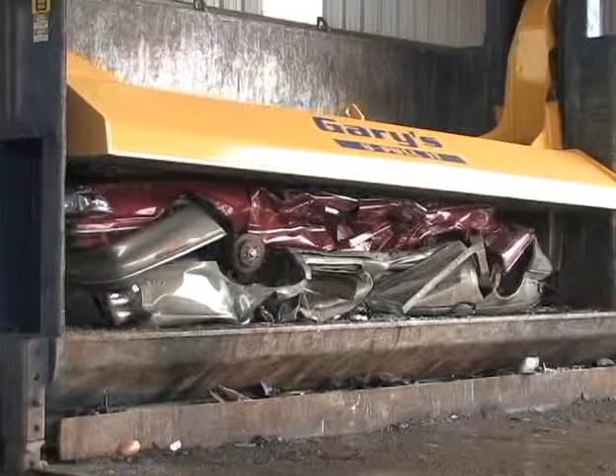But the fact remains, America is married to the automobile as its principal form of transportation, and any solution to the nation's energy and conservation dilemma must address America's obsession with the automobile. What few people realize is just how aggressively and consistently the automotive recycling industry has pursued green sustainability.

In fact, the automobile is the most recycled product in the world today, with nearly 95% of the vehicle weight recycled. The actual recycling process may start at the accident scene, where the tow operator or the first responder is responsible to clean up the glass and debris expelled from the vehicle because of the collision. That material is then placed in the trunk for the recycler to process.

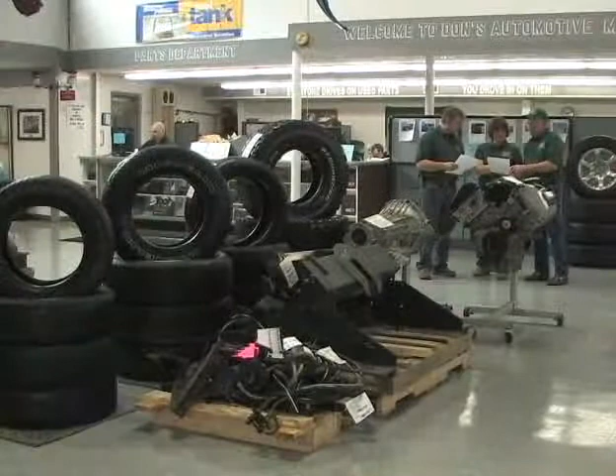Leading the effort to educate the consumer and auto manufacturers on the benefits of sustainable green automotive recycling is the Automotive Recyclers Association, or ARA. Through its affiliates, the organization serves thousands of member companies and part suppliers in the United States and has cooperative agreements in 14 countries spanning the globe.

The ARA's efforts range from partnerships with original equipment manufacturers on automobile design and recyclability to the establishment of a green group of auto recyclers called Certified Automotive Recyclers, who promote and practice sustainable green disassembly standards.

Choosing recycled auto parts when repairing your vehicle is a green option in a number of ways. Certainly, it will save you some green in your wallet, as the parts are generally far less expensive than new, yet often carry the same or even a better warranty. Besides, why put a brand new part on a used car? Why not give the environment a break and reduce your carbon footprint, limiting the number of pollutants going into the air to produce all those new parts?

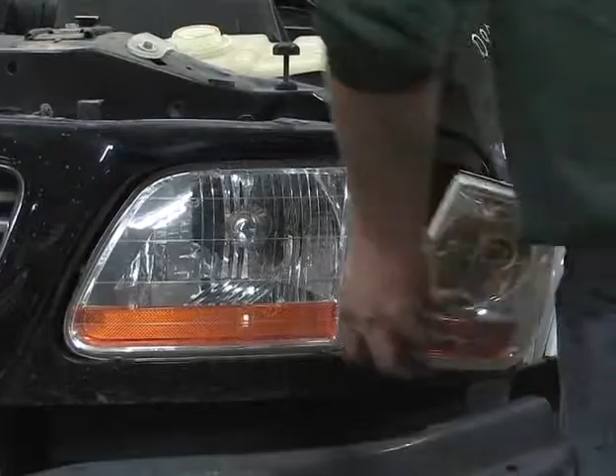Of the nearly 250 million vehicles on the road today, 12 million will reach their end of life this year. For nearly all of those vehicles, end of life does not mean the end of the road. Everything from wheels to seats are sold to the general public who work on their own vehicles. After all of the parts are removed, the vehicle is then crushed and sent to a shredder, which sizes and separates all of the materials.

Such recycling saves an estimated 85 million barrels of oil every year that would otherwise have been used in the manufacturing of new parts. It also saves enough steel to produce almost 13 million new vehicles.

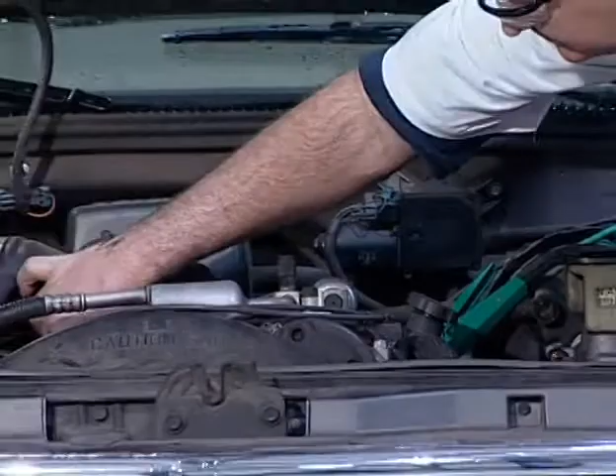Still, in many car owners' minds, recycled parts just don't measure up to new ones. It might seem a legitimate concern to some consumers. For example, why would I want a recycled airbag in my car? Not only are used recycled parts built by the original vehicle manufacturer to meet specific durability, reliability, and most important, safety standards. New automobile designs and materials challenge automotive recyclers.

As automobile recyclers strive to remain at the forefront of the green movement, industry leaders continue to seek new ways to demanufacture vehicles, remove pollutants from the environment, and meet consumer demand for green replacement parts. As the transportation needs of the nation meet the sustainability needs of the planet, auto recyclers have adopted a proactive green approach.

In our effort to create and maintain a sustainable green vehicle demanufacturing process and parts distribution network, automotive recyclers strive to take it one step further and maximize the 3 R's: reduce, reuse, recycle. Reuse is one step ahead of recycling in this equation, and the winners are consumers and the environment.

In countries all over the world, urbanization is creating ever-growing volumes of waste. With environmental problems now of paramount concern, ways have to be found to process waste materials safely, efficiently, and without causing pollution.

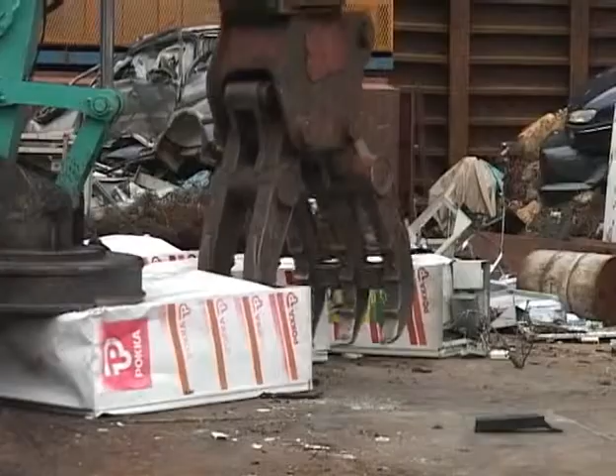Currently, technologies for separating valuable, reusable resources, such as iron, aluminum, and copper from waste, are attracting great attention.

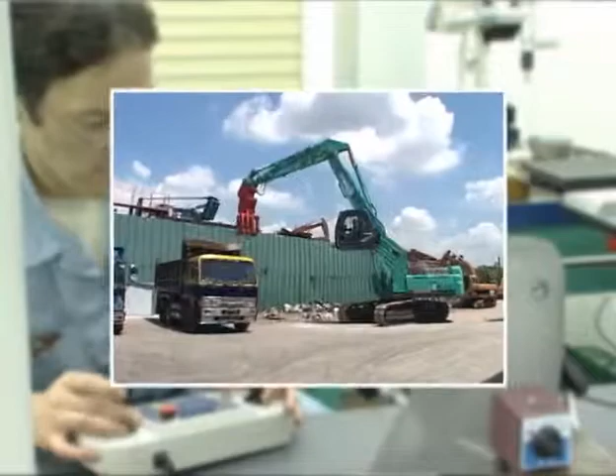To respond promptly to the new requirements of these times, we at KOBELCO have been pressing ahead with research and development on machines that can assist in the handling of scrap metal. Among them are the KOBELCO multi-dismantling machines, which make light work of dismantling end-of-life vehicles and other discarded appliances to separate reusable resources.

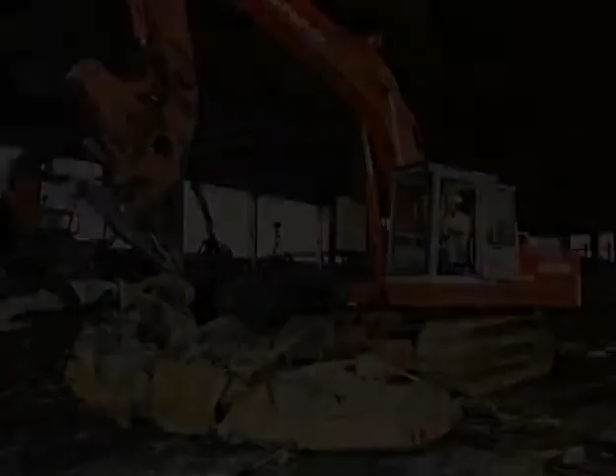In 1979, KOBELCO developed Japan's first specialized machine for vehicle dismantling, and the scrap metal business never looked back. The objective at that time was to provide mechanized means for the safe removal of engines, chassis, and other hard components from vehicle bodies.

Subsequently, attention was focused on recycling non-ferrous metals such as aluminum and copper, and KOBELCO have devoted years of research to develop and launch a full lineup of multi-dismantling machines that can take apart engines as well as vehicle bodies and remove tricky parts such as harnesses.

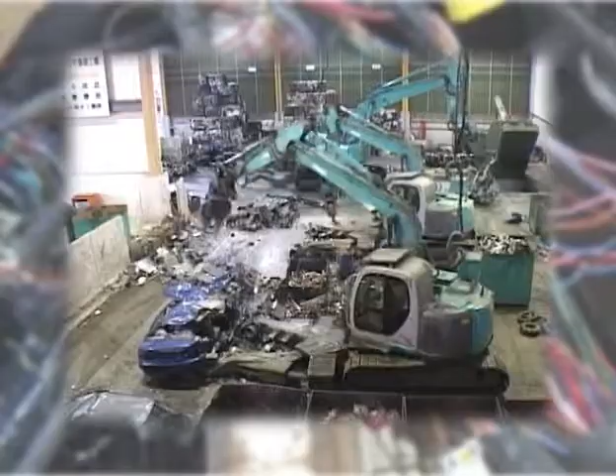Here we look at how two different multi-dismantling machines, the SK200 and the SK135SR, bring outstanding performance and user-friendliness to vehicle dismantling work.

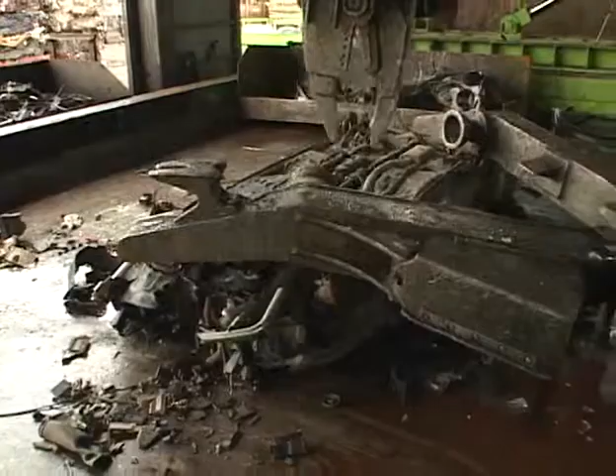Multi-dismantling machines are fitted with a clamp arm for gripping and cutting, and a rotating nibbler for twisting and tearing. Through the combined operation of these features, vehicles can be taken apart with greater precision, and their component parts sorted and separated.

Vehicle dismantling work using a multi-dismantling machine can be broadly divided into two processes: dismantling the vehicle body and dismantling the engine.

For body dismantling, the SK200 is ideal. It works fast and excels at handling rigid parts, such as chassis, where real strength is required.

For engine dismantling that involves extracting harnesses and other more delicate operations, the SK135SR comes into its own.

The SK200 is fitted as standard with a powerful KVE 720 PR nibbler for the toughest jobs. And the SK135SR is fitted with a KH 750 PR nibbler designed to accomplish more delicate tasks.

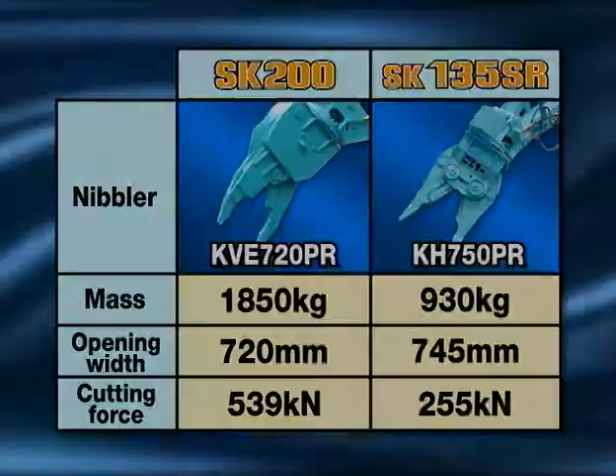Before we look at how these multi-dismantling machines actually tackle an end-of-life vehicle, let's examine their controls. These consist of buttons located above the levers on the right and left side of the cab, and foot pedals.

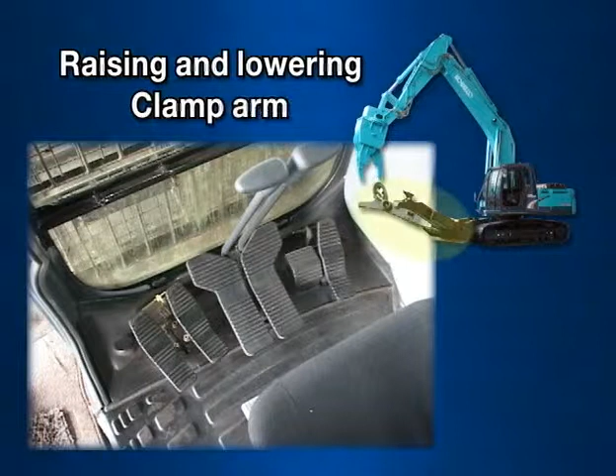Raising and lowering the clamp arm is controlled with the outer pedal on the left. Pressed at the heel, it raises the clamp arm. Pressed at the toes, it lowers it.

The clamp arm is opened and closed by means of push buttons to the right and left above the levers. The button on the left opens the clamp arm. The one on the right closes it.

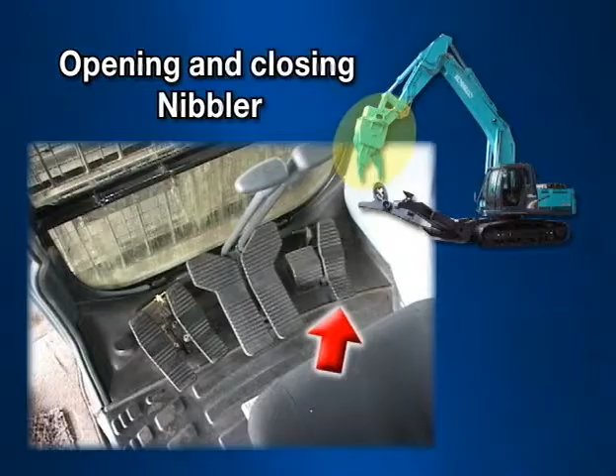The nibbler is controlled through the outer pedal on the right. Pressed at the heel, the pedal opens the nibbler jaw. And pressed at the toes, it closes it.

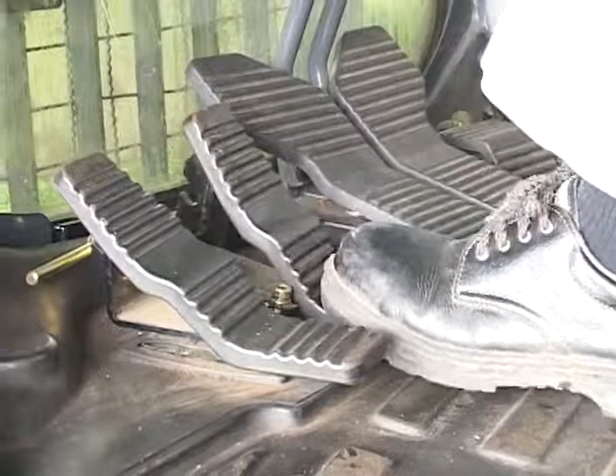Rotating the nibbler is controlled with the second pedal in from the left. Pressing it at the heel rotates the crusher to the left, and pressing it at the toes rotates it to the right. Full dismantling can be accomplished through a combination of these controls.

There's some preparation to complete before actual dismantling work can begin. The recycling of parts from end-of-life vehicles is expected to become an increasingly important business. Engines, doors, and any other parts that can be reused have to be removed in advance. For dismantling to be both safe and efficient, preparation also includes removing tires, releasing gas, and draining off fluids.

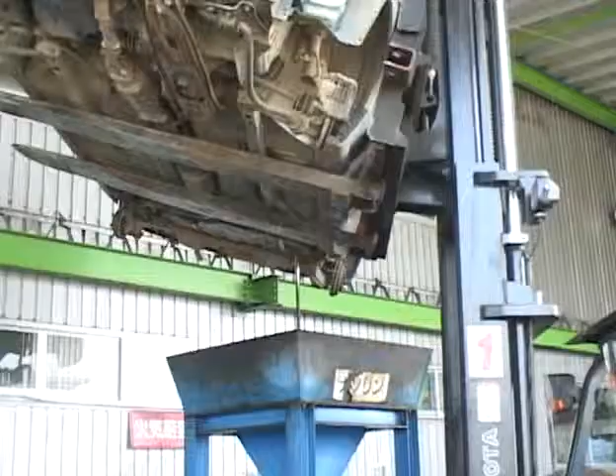Once the preparation work is complete, the vehicle is ready to be taken apart. Here, the SK200 is ideal. It works fast.

First, the vehicle is gripped firmly with the clamp arm. Being adjustable, it can grip vehicles of all shapes and sizes.

The bumper cover is gripped by the nibbler and pulled off. The bonnet and fenders are pulled off.

Harnesses at the front are extracted. The bumper is pulled off. The radiator is removed.

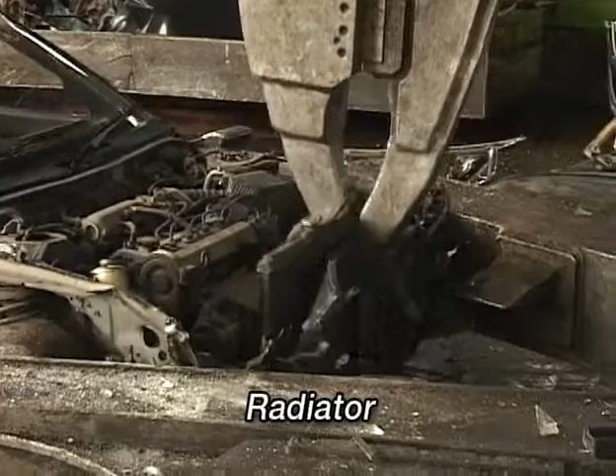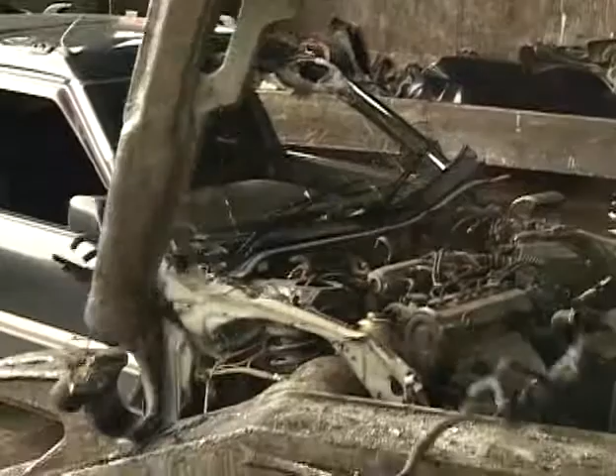The fuse box is gripped and taken out. The wiper motor is removed. The windshield can be taken off cleanly by cutting around the edge of the glass with the tip of the nibbler.

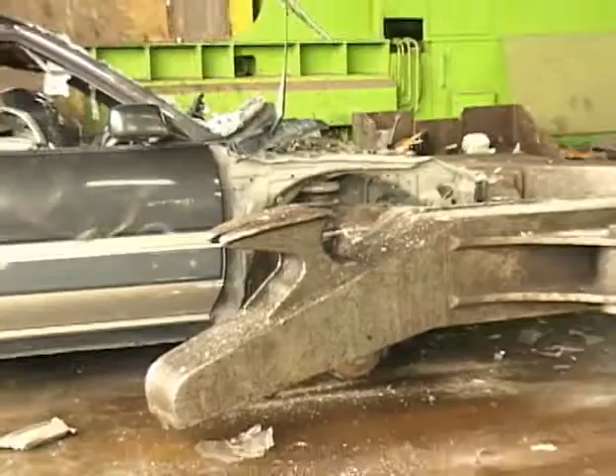The harnesses for the instrument panel are removed. Any electrical equipment attached to the harnesses can easily be separated using the teeth on the front left of the clamp arm. The dashboard is removed, and this too can be taken apart using the teeth on the clamp arm.

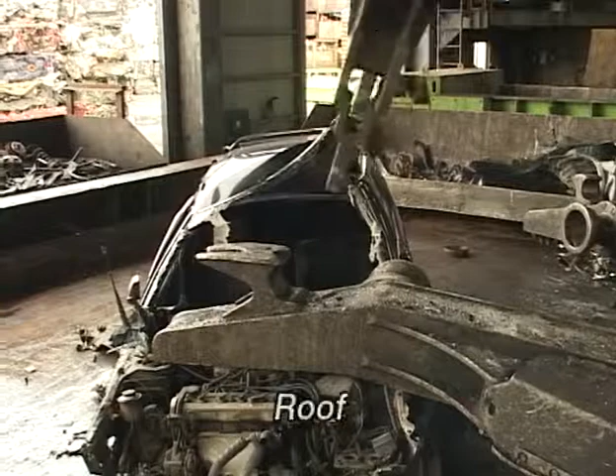Next, the roof is opened. As you can see, when the roof is cut along one side with the nibbler, it opens very easily.

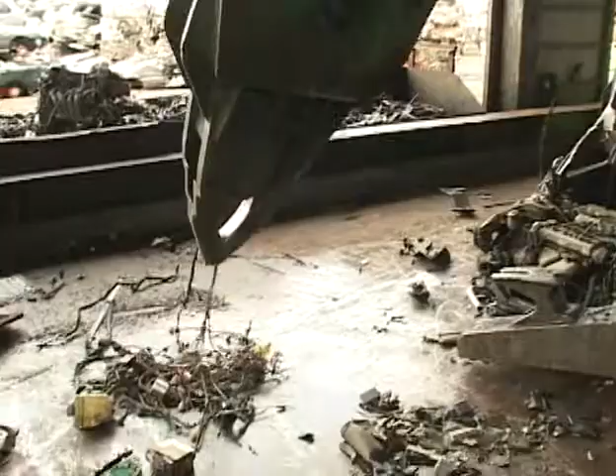The harnesses around the doors are extracted. Depending on the customer's requirements, at this point, the harnesses inside the doors and under the seats can be removed. Using the SK135SR, small parts, such as the motors for the power windows, can be taken out.

In Japan, normally ferrous scrap fed to electric furnaces should contain no more than 0.3% copper. The multi-dismantling machine can carefully extract harnesses, motors, and other parts high in copper content to produce higher-grade ferrous scrap.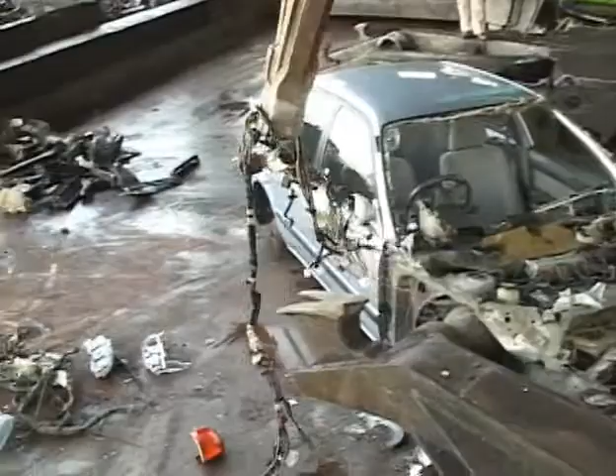Next, the structural parts in the vehicle's underside are removed and the engine is taken out. First, the nibbler lifts one side of the vehicle and uses its rebound to turn the vehicle upside down. Then the clamp arm grips it firmly once again.

The front cover is pulled off. The frame members and other structures are held in the nibbler's jaw and twisted off by rotating the nibbler.

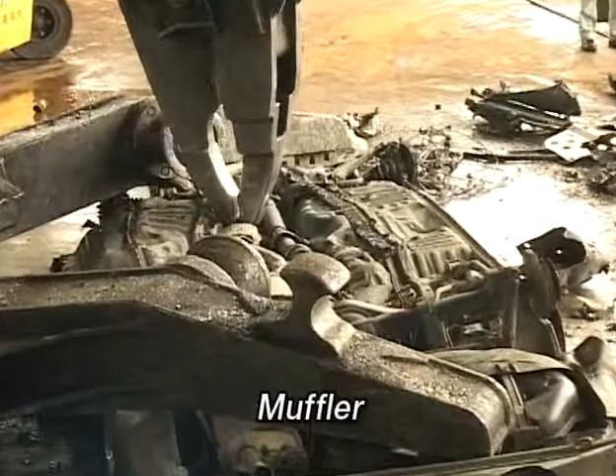The muffler is gripped and pulled out. The catalytic converter, which contains platinum, is removed.

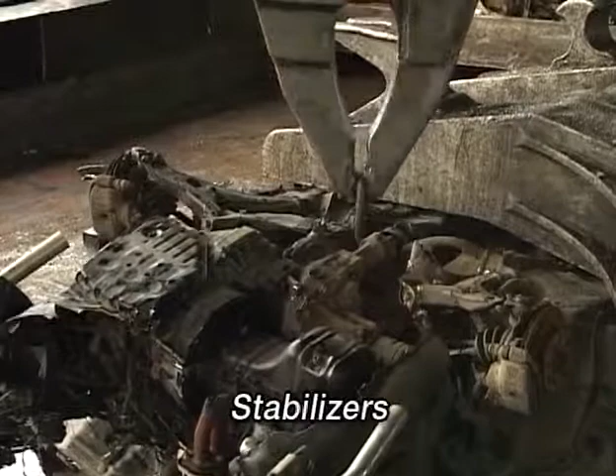The stabilizers are pulled out. The suspension is lifted out.

If the suspension is fed directly into an electric furnace, it may cause an explosion. So the nibbler is used to grip the struts and bend them against the right projection on the clamp arm to allow the gas and oil in the shock absorbers to be drained out.

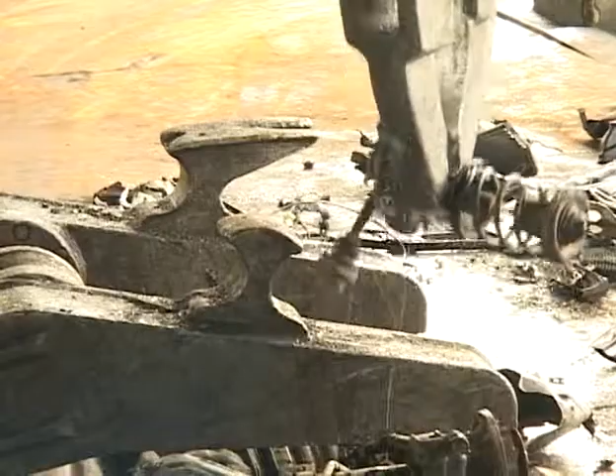The front of the frame is opened and the engine is taken out.

The clamp arm grip is rearranged. The rear wheel axle is taken off. The fuel tank is removed. Finally, the exhaust pipe is taken off.

Electrical parts and non-ferrous metals are separated to leave only parts that can be turned into high-grade ferrous scrap. The dismantled body is compacted in a press to be reused by feeding it into an electric furnace.

Using the procedures you've seen with the SK200, it takes only 20 minutes to dismantle a passenger car.

Next, let's see how the engine can be further dismantled. A lot of aluminum is used for the cylinder head, pistons, and other parts in engines.

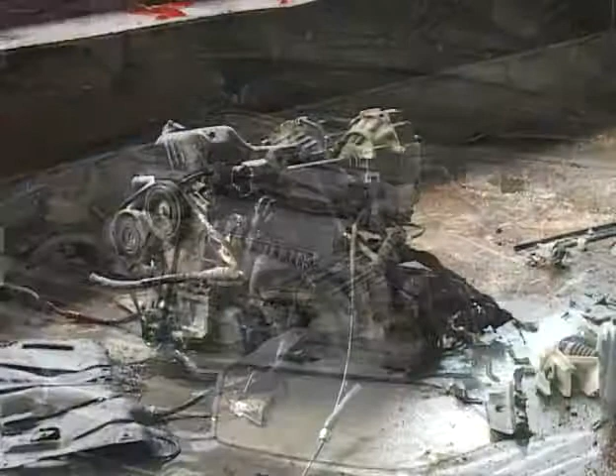Creating high-grade aluminum ingots for recycling requires the careful removal of other non-ferrous metals such as zinc, which melts at a lower temperature than aluminum. This is ideal work for the SK135SR, which excels in delicate work.

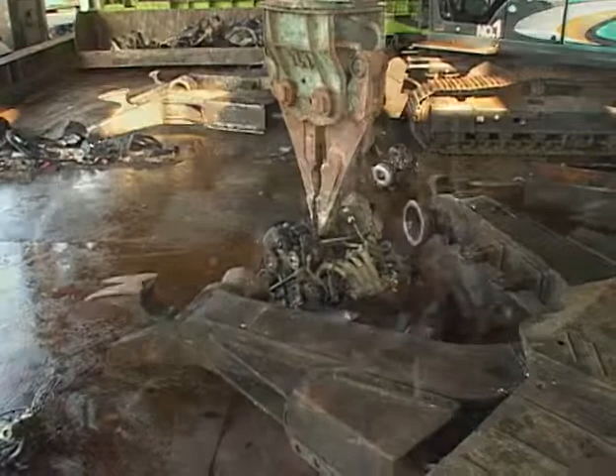First, the engine block is gripped by the nibbler and is lightly sandwiched between the bowl-shaped grips of the clamp arm. Harnesses and hoses are removed from the engine.

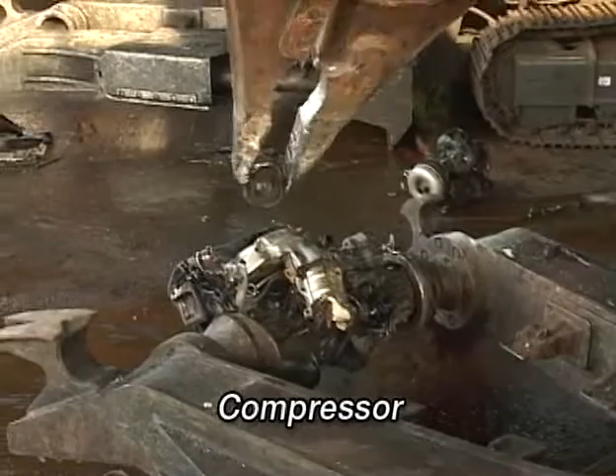Using the tip of the nibbler, the engine is raised at an angle to simplify the removal of parts. The dynamo is pulled out. The compressor for the air conditioner is taken out. The starter motor is removed.

Next, the engine cylinder side is held with the nibbler and the transmission block side is held between the clamp arm grips, and they're separated.

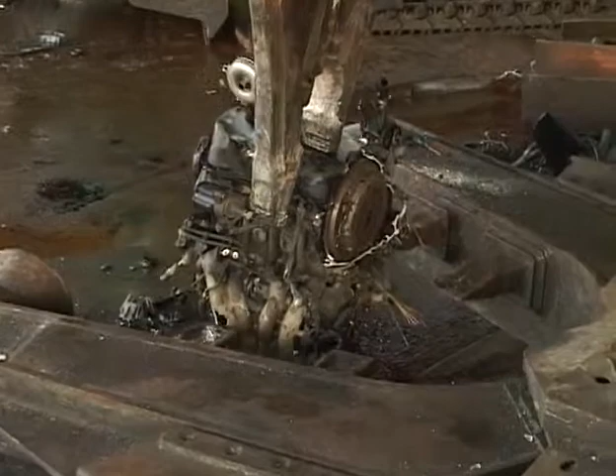Cutting tooth on the inside of the clamp arm is used to separate the cylinder head from the cylinder cases.

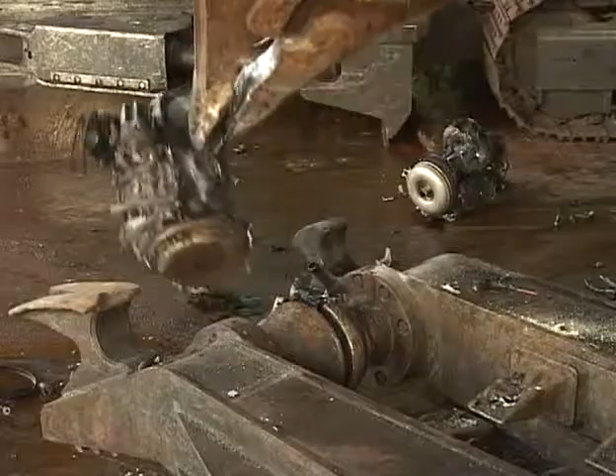The aluminum parts of the AT case are crushed between the grips of the clamp arm. This is the aluminum left from the dismantled engine.

In this way, the KOBELCO multi-dismantling machine can take apart an engine very efficiently using its unique design of bowl-shaped grips and clamp arm teeth. When using the SK135SR for vehicle dismantling work, about a 20-ton weight of engines can be handled in one day.

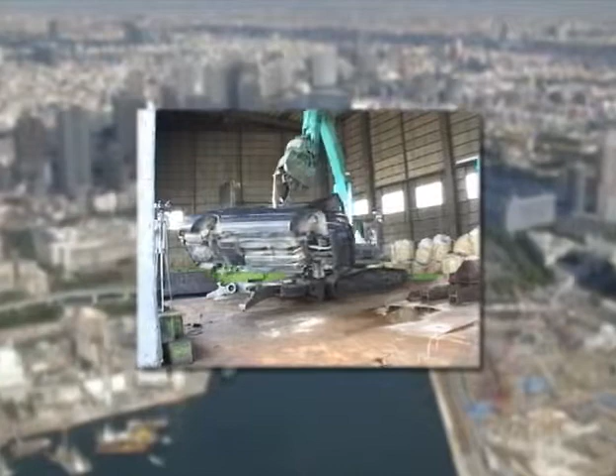As lifestyles everywhere become more urbanized, the numbers of end-of-life vehicles are expected to grow. The way they're handled must be environment-friendly, as well as speedy, safe, and efficient.

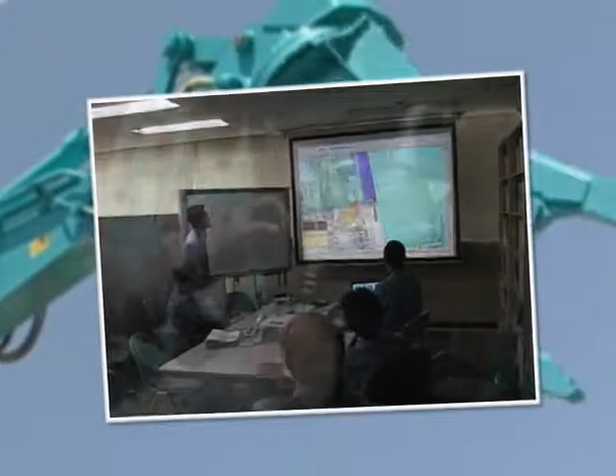To respond swiftly to these requirements, KOBELCO has worked ceaselessly on new machine development, incorporating feedback from our clients. As a pioneer in multi-dismantling machinery, KOBELCO has built up a wealth of knowledge and sophisticated technologies in this field. We're confident you will not be disappointed.

All of it benefits the current range of multi-dismantling machines from KOBELCO.